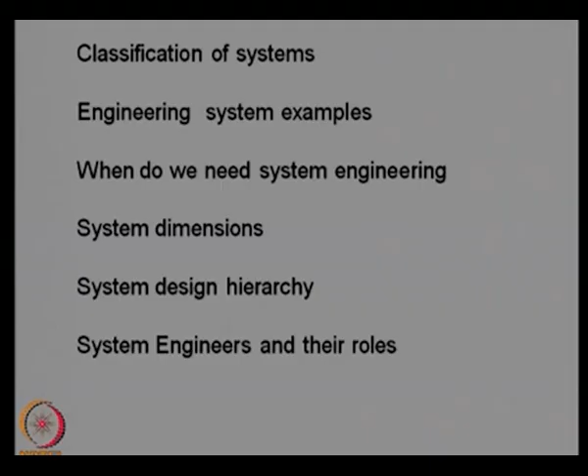So let us look at the classification of systems. As we explained in the last class, we found that there are various kinds of systems. There are man-made systems and there are natural systems. So we can basically divide these systems into two classes: one is the natural systems and the other one is the artificial systems.

As we know, natural systems exist in nature. The human body is a system, the ecosystem is there, and we have the systems of planets and other celestial bodies. These are natural systems, and there are complex natural systems, such as the human body, where the complexity of the system is still not fully understood. So these are examples of natural systems, where some are very simple but some are very complex, which is beyond our analysis at this stage.

But then we have systems with human intervention or human behavior, like artificial complex systems with complex technical but simpler human structure, artificial complex systems with complex human but simpler technical structure, and artificial systems with both technical and human structural complexity. So depending on the system type, we can classify them based on whether they are complex in human behavior or complex in technology or technical behavior.

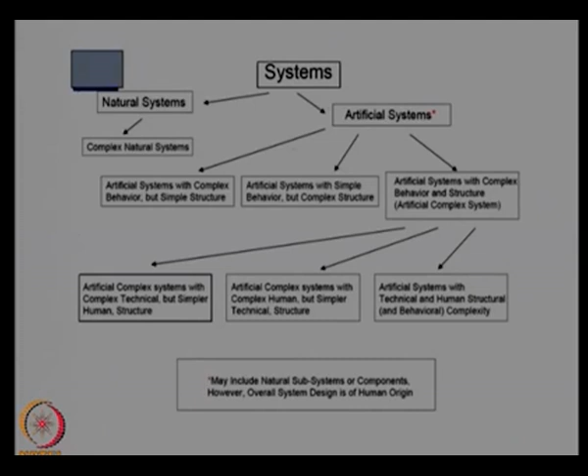Let us take a few examples of these systems and try to understand what subsystems are involved and how they have become part of a larger system or a subsystem of some other system. Take for example spacecraft as a system. As all of you know, it can be considered as a system composed of a variety of subsystems. Every spacecraft has many subsystems, and this spacecraft architecture is well defined, because there is a well-defined structure for the spacecraft architecture, and the subsystems are in turn composed of even smaller subsystems.

For example, take the communication subsystem or the payload system of a spacecraft. As you can see, communication is a payload in a spacecraft, and we can consider this as a subsystem of the spacecraft. There are many other systems that are part of the payload. You can see that the antenna is a part of the communication payload, along with amplification, modulation, demodulation, routing, encryption, decryption, filters, and multiplexers - these all become part of the subsystem of the spacecraft.

Similarly, we have the spacecraft bus where the attitude determination and control is there, command and data handling is there, payload processing is there, then power, propulsion, software, structures, telemetry, thermal systems. So these all become part of the main system. If you take spacecraft as a system, then you can find these are the subsystems of the spacecraft.

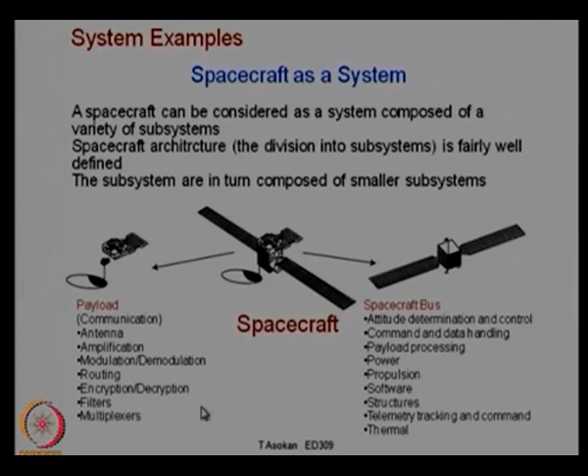But if you take the space system as a whole system, then you will find that the spacecraft is part of a larger system, which is the space system. You will have many spacecraft in the space system, which is the other spacecraft in the constellation. Then you have the different segments for the space system, like the ground segment, the space segment, and the launch segment. So these all become subsystems, main system of the space system.

Though spacecraft can be considered as a system by itself, when we define the space system, then the spacecraft becomes a subsystem of the main space system. Thus any system can be considered as a subsystem of a larger system, or it can be considered as a system by its own merits. So it depends on how you actually define the system and what you are going to design. Depending on that, we need to define what is that particular system and what are the subsystems of the main system, and then how do you define the boundary of the system and the subsystems.

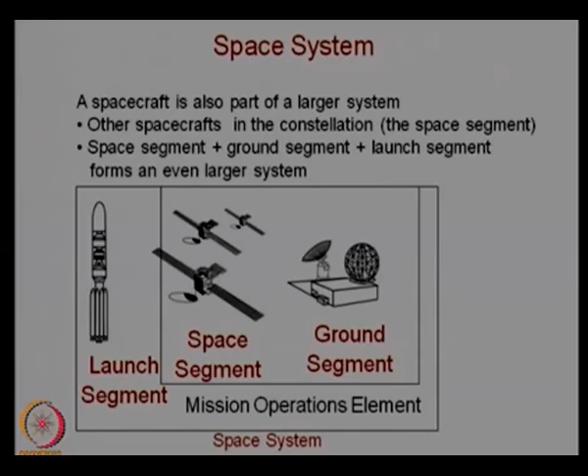As you can see here, this shows the space system, where there is a launch segment, a space segment, and a ground segment, which are all part of the main space system.

This figure shows another diagram of the product development system for Ford Motor Company. We will not go into the details of this figure now, because we will be discussing it later when we discuss the product development process or the system development process. It shows how, from the initial customer requirements, customer satisfaction is achieved through various processes, passing through different stages of design, fabrication, testing, integration, and validation, and then to reach the customer. So the development itself becomes part of a major system, the product development system. We will discuss this in detail at a later stage.

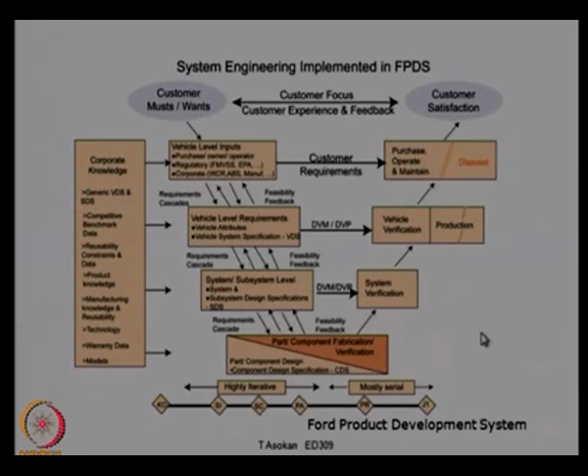This is another example of a complex, man-made system: the air defense system. As you can see, the air defense system has various subsystems. Something can be in the air, something can be on the ground, and something can be completely controlled by man, or completely automated with different sensors and signal processors kept at different locations.

There are radar sites which are used to find the locations of aircraft. Then there are early warning and control systems, which consist of many aircraft and other sensor suites. Then we have the air traffic control center, which controls the movement of air traffic. Then you have the interceptor bases where the air defense systems are placed, from where they can take off and carry out the missions.

Then there are civil defense applications for this particular system, where civil defense centers send information to the main database center or control center. Then we have ammunition systems at various locations, and radio sites for transmission of signals. And then we have all those base centers which coordinate the activities of various centers as part of this system. So as you can see, it's a fairly complex system with various subsystems and a lot of interaction between these systems, and therefore the system engineering concept is well suited for this kind of complex man-made system.

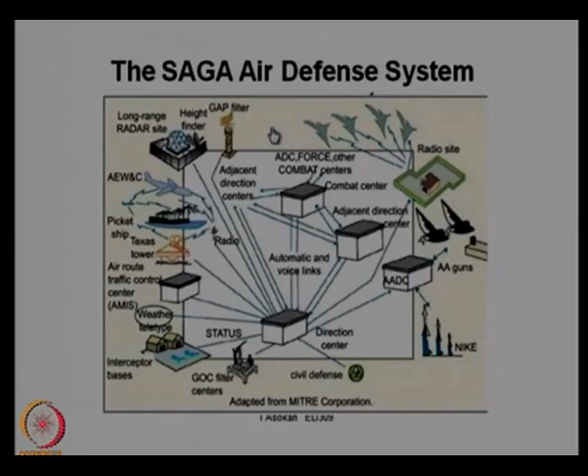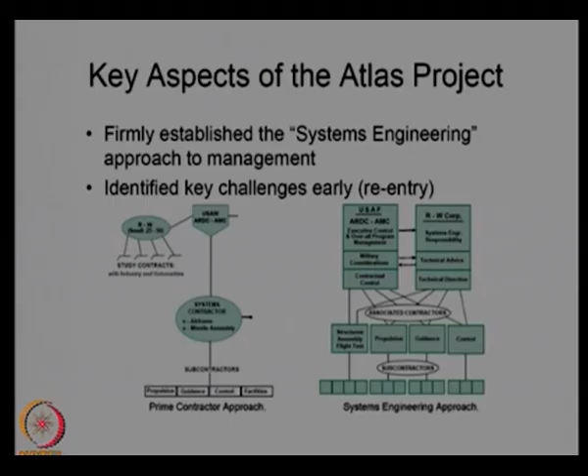So we saw that there are different kinds of systems and different kinds of complexities in the system, but we need to find out when we really need to apply the system engineering concept, whether all projects are good candidates for system engineering or whether there are projects which do not warrant the need for a system engineering concept. So how do we decide this based on our approach to the project or our understanding of the project?

We discussed some of the failures in the previous class, system engineering failures, where we discussed the airbag system failure for passenger cars, and we found that there was a failure in the requirement analysis of the project. There was a failure in Pathfinder, which is again a space system where the communication failed. This was because of an interface design failure, and again the Ariane 5 launch vehicle failure we discussed.

These are all various examples of system failure, and whether they are candidates for the application of engineering system design. If you look at this, we need to find out the real causes of system failures to see what actually happened in the system or what actually caused the failure of the system.

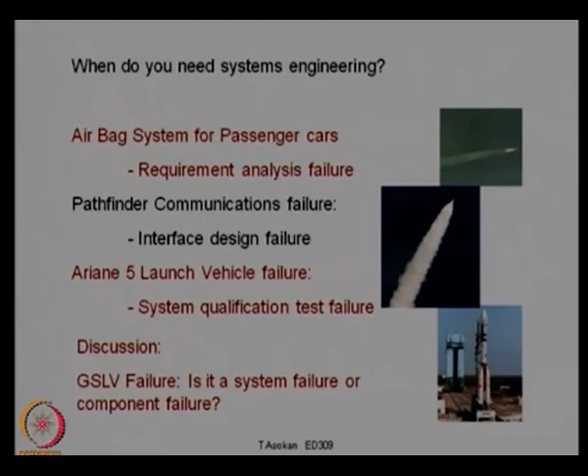Now this discussion point is for you: you can find out from the literature or through discussion with your friends or colleagues what actually happened in our GSLV failure. We know that our geosynchronous satellite launch vehicle failed recently, and there were many accounts for the failure of the system.

So probably you can identify whether there was a system failure or a component failure. We should be able to distinguish between these two - what actually happened, whether there was a failure in the whole system or the process of development of the system, or there was a component failure which was more of an engineering failure that failed to meet the desired design requirements of that particular component.

When you analyze this kind of failure, you will know whether it was a problem with the technical design of the system or a problem with the whole system design. Based on that we will be able to tell whether this was a failure in system engineering, and therefore we need to look at the process and procedures we followed for engineering the system, and accordingly go ahead with the design of the system or apply the principles of system design.

So let us look at the criteria for deciding to take the system engineering principle for a particular project. The characteristics of a system whose development, test and application require the practice of system engineering: the system is an engineered product and hence satisfies a specified need - that is one of the basic requirements, and most systems satisfy this. The system also consists of diverse components that have intricate relationships with one another, and hence is multidisciplinary and relatively complex.

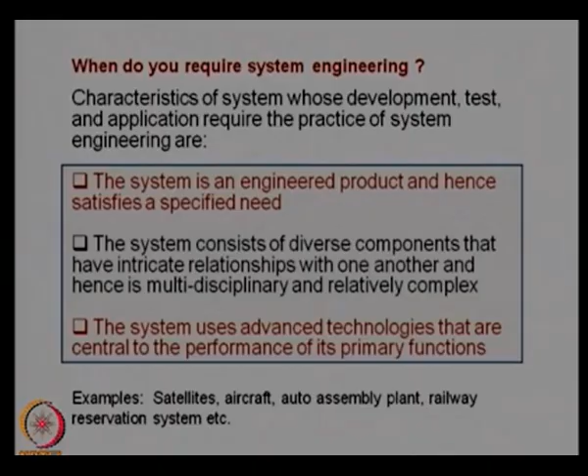For example, if you take the railway reservation system, which is one of the best online systems we have for booking railway tickets, you know that there are multiple subsystems. There are customers, booking agents, railway station booking facilities, centralized servers, and payment agencies. All these are interacting with the main system, and they are using the latest technologies of communication and networking as well as data analysis and data processing. So that becomes a very good candidate for applying the principles of system engineering when we develop systems of complexity like this.

So in the previous class, system engineering integrates all the disciplines and specialty groups into a team effort, forming a structured development process that proceeds from concept to production to operation. If you apply these principles of system engineering, we can have a structured design process which proceeds from concept to production to operation of the system, and it considers both the business and the technical needs of all customers with the goal of providing a quality product that meets the user needs.

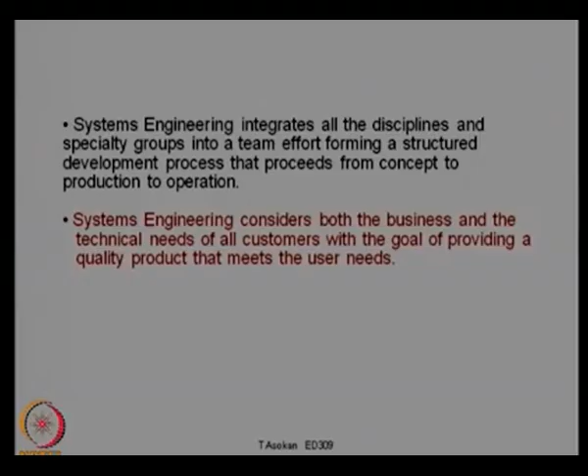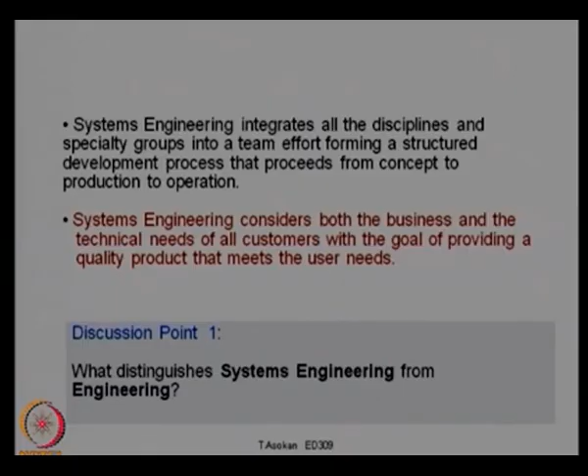Okay, so this is again a discussion point for you. We discussed system engineering in detail. So what actually is system engineering, when do we use system engineering principles, and what are the basic requirements of applying system engineering? You can have a discussion on what distinguishes system engineering from conventional engineering, and how a system engineer is different from a conventional engineer or a domain expert. This will help you to understand the system engineering concept in a better way, and appreciate the importance of system engineering in developing complex engineering systems.

We discussed the system, and as I mentioned, the system has a technical component as well as a human component, because there are complex human systems and complex technical systems. So let us look at the technical dimensions of the system. As you can see, there are 6 levels of technical dimension for any engineering system. So we will start from the highest level.

It is basically the physical environment of the world where the system operates, so we call it the system context. Every system operates in a particular environment, so that environment becomes one of the dimensions of the system, because all these dimensions are important in system development: they have an impact on the system, or the system can be impacted by those factors.

So the highest one can be the physical environment of the world, and then we have different levels. If I start from the lowest level, level 0, that becomes the parts or lines of code of a system. You will have very small components which are off the shelf, or which do not require any specific design, like nuts, bolts, screws and small fasteners. These all become parts, the 0th dimension of an engineering system. In software, the lines of code become the 0th dimension.

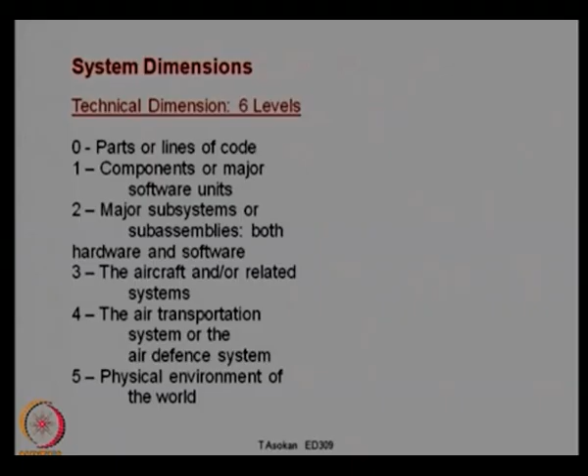Let us look at the social dimension. Every system has social dimensions because it has some social impact: humans are involved, and it is mainly designed for human use, so there is human intervention or human impact on the system. Again, we can have 6 levels of social dimensions. The highest level is the society, nations or communities where the system is being used, depending on the country or society where it is implemented.

The lowest level is the individuals who directly interact with the system or are directly involved in its design, development, use or maintenance; that becomes the 0th level dimension. Then there are working groups or teams, either development, operation or maintenance teams, which become the next level. Then the organizational units: in an organization there will be a design team, a fabrication team, a machine maintenance team. That becomes the 2nd level, the organizational units.

Then single organizations are the next level, where a larger organization like DRDO has many labs across the country, and each lab becomes a single organization, the 3rd level dimension. Then there are extended multi-organization enterprises, including partners and suppliers: a group of suppliers, consumers and subcontractors, the 4th level. If a company is developing a system, there are many suppliers, quality assurance teams, organizations which monitor quality, and organizations which will finally use it; they are also part of the system.

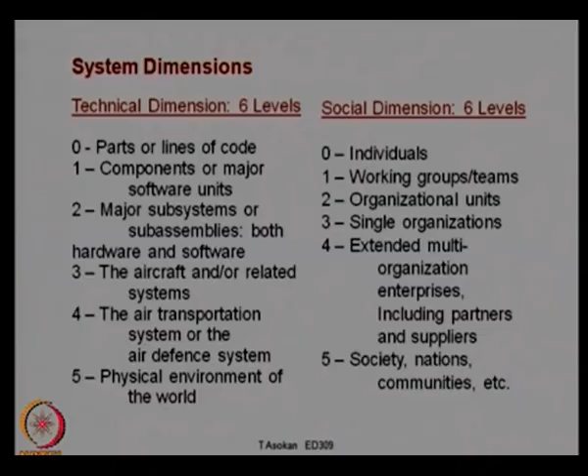So as you can see, there are technical and social dimensions for an engineering system, and therefore we need to look into the social aspect as well as the technical aspect of the system design when we start the design and development of an engineering system, which is finally going to be used by the customers, where there is a lot of human interaction as well as technical complexities.

So we discussed the different dimensions of the system, and I told you that there are different technical dimensions for the system. As I mentioned, there are lower level parts or components which become the 0th level system dimension. Then there are sub components, where the signal amplifier, cathode ray tubes, gear trains, valves or nozzles become the sub components. Then we have the components like signal receivers, data displays, power transfer, material reactors, thrust generators, etc.

Then we have the subsystems, where signal networks, database, material preparation, engines, etc. are being used for developing the final system. And you can say that the communication system can be a system on its own merits. Then there are information systems, material processing systems, aerospace systems.

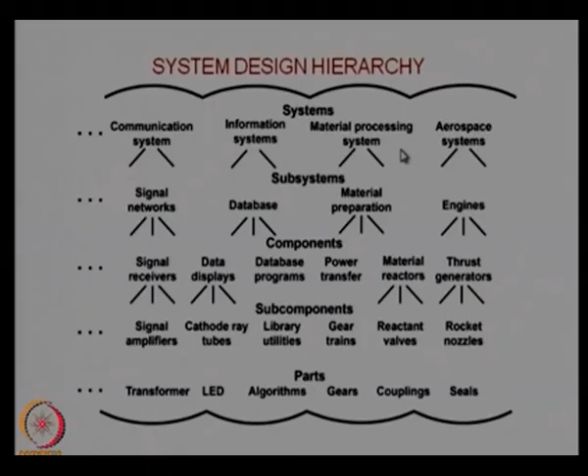So these are all the top level systems, and of course when you use these systems for another system, they become subsystems of another major system, like an air defense system. If you take that as the main system, then communication, information, material processing, all these become subsystems of the main system. So that was about the system in general.

Then we need to see who are the people who design it and what they do. The people who are responsible for design, development, integration, verification and validation of engineering systems are known as system engineers. They are different from the engineers or domain experts like a mechanical engineer, electrical engineer or electronics engineer. System engineers are not exactly the domain experts, but people who see the big picture and try to integrate many things into a single piece.

So they have the larger picture of the system, and they know what can go wrong and what issues are coming up. So they do the troubleshooting and make sure that the system development process takes place in a structured manner without any problems. System engineers design the overall architecture, but they are not the people who really design the components. Component design is done by the domain experts, like mechanical engineers or electrical engineers.

They prioritize the system requirements. There are different requirements for the system. Those who are designing a component may not know the actual requirements of the original system which the component is part of. So the system engineers are the people who prioritize the system requirements and identify the components or the requirements of the components, and then pass them to the design engineers.

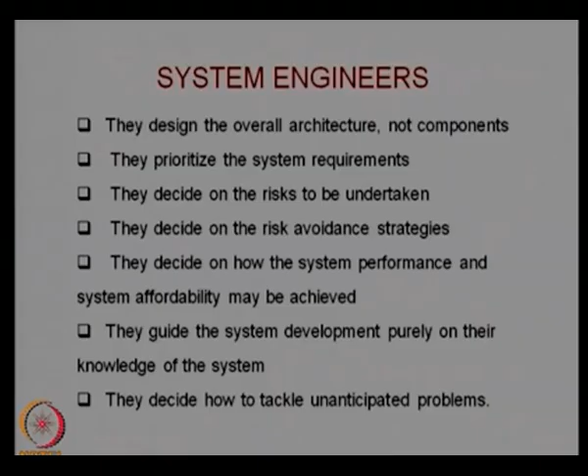So what are the knowledge domains where the system engineer operates? As I mentioned in the previous slide, their responsibilities are much more than the design of components. So they are the people who actually manage the whole design process. What are the domain knowledges or domain areas where system engineers operate?

As you can see in this picture, the parts and subcomponents are the duty of a design specialist. So the system engineers will not get involved in the design of parts or subcomponents. They will just give the specification for these components and parts to a design specialist. Then the design specialist will design the component, select the material, select the software or whatever subsystem is required for that particular design. They will identify those requirements and then develop the parts or subcomponents and pass them to the next level where the components are assembled or integrated into a subsystem.

Then there are subsystems and systems, which are actually the domains of the system engineer. So the system engineer is the person who does the integration of systems, directly involved in getting these components into subsystems and integrating them into the major system. So the domain of the system engineer is in this area, where subsystems and to some extent component level integration are part of the system engineer's responsibility, and the design of parts and subcomponents is purely done by design experts.

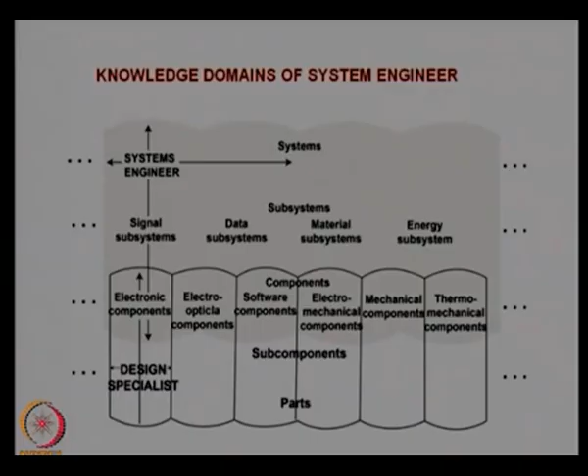So they are people from the electrical engineering domain, mechanical engineering domain, electronics, or software specialists who specialize in a particular component development. There will be separate design teams charged with designing these components, and finally it will go to the system engineer, who will integrate them into subassemblies, do the testing, verification, and all the required procedures to ensure these components and subsystems perform to the desired requirements. Then they go for integration to the system level, and finally the system will be delivered to the customer by the system engineers.

So there is a clear role for the system engineer, who is actually responsible for the delivery of the system, and therefore they have the big picture of what is actually expected from the system. Accordingly they work to make sure that all these components and system subcomponents designed by the specialists are meeting the requirements of the system. These are the responsibilities of the system engineer. So a good system engineer needs to have some characteristics which are actually needed for managing the whole project.

So these are people who actually enjoy learning new things and solving problems. Every project is a challenge, every project is new to the system engineer, and they really enjoy learning new things and solving problems, and they like challenges. These are people who really like to take challenges, design something new and try them, and even with chances of failure, they will try to make sure these new challenges succeed, and they keep doing these things because they love taking challenges.

They are skeptical of unproven assertions. So whenever there is an unproven assertion, they will question that particular assertion and keep challenging it to make sure they understand the whole concept, and that they are working with complete knowledge of the whole process or the system. They are open minded to new ideas, since every time there needs to be new ideas and new concepts for developing systems.

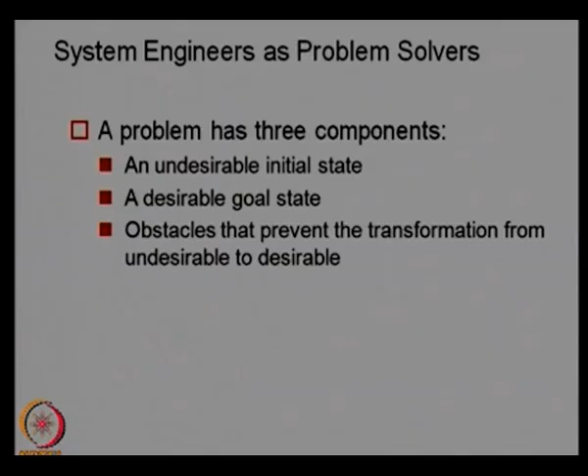Then what actually do system engineers need to do? System engineers act as problem solvers. These people are really into solving problems almost every day. Every problem has three components, as you can see: an undesirable initial state, a desirable goal state, and obstacles that prevent the transformation from undesirable to desirable state. These are the three components of a design problem, and every engineer tries to solve these to get a solution.

So as a system engineer, as a problem solver, you look at the problem: what is the undesirable state, what is the desirable state, and what are the things which prevent reaching that desirable state, and then try to find a way to reach that desirable state. That is the role of a system engineer.

The characteristics of good problem solvers are that they are intelligent and creative. Creative thinking is an important quality of a good problem solver. He needs to look at the problem in an intelligent and creative way, and try to see whether he can adapt an existing technology, or look for a new technology, or find a totally new or innovative way to solve that problem.

They are good decision makers. Their decision making behavior is very good. They recognize dependencies very fast, estimate the importance and urgency of the particular problem, and maintain continuity while being very flexible to make changes whenever needed. They are also very good at accepting failures. There is no fear of failure for these problem solvers, because there is always a risk of failure, and it is part and parcel of any problem solving.

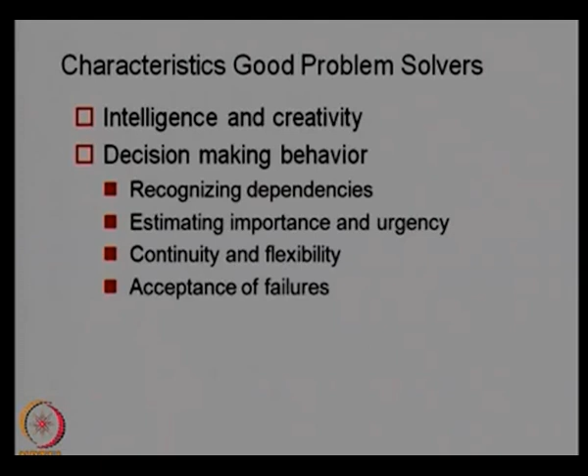At this stage I would like to give you a few assignments and project work. The first assignment for you is to identify 5 natural systems and 5 artificial systems, decompose one of these systems into technical and human systems, and identify the levels of interaction.

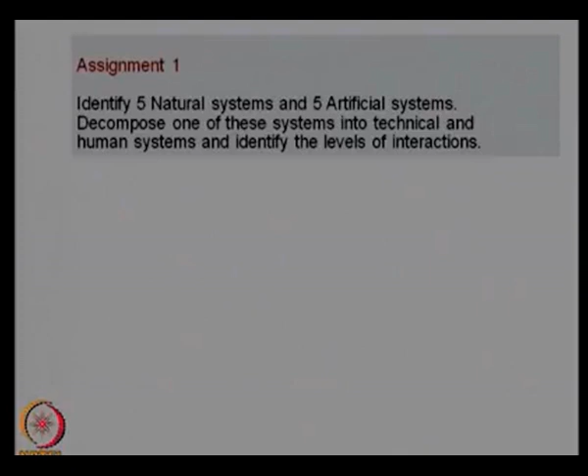As I mentioned, there are many natural and artificial systems. Identify a few of these systems and take any one, then decompose it into technical and human system, and try to understand the interaction between them. There will always be interaction between the human system and the technical system, so try to identify what types of interaction take place.

As I gave you many examples, like a railway reservation system, a satellite system, or a missile system, you can take any artificial system you find interesting, analyze it, and identify the technical and social or human dimensions and the interaction between the human and technical systems.

This is the first assignment, and I would like to give you a group work. Of course, if group work is not possible, you can take it as an individual assignment. From the history of industrial disasters, identify one case study for a system failure.

I have explained many system failure case studies, so I request you to consider one system failure which is not discussed in these lectures. Identify the causes for the failure and make a presentation highlighting factors like the system details, failure modes, failure analysis, root cause, and the proposed solutions.

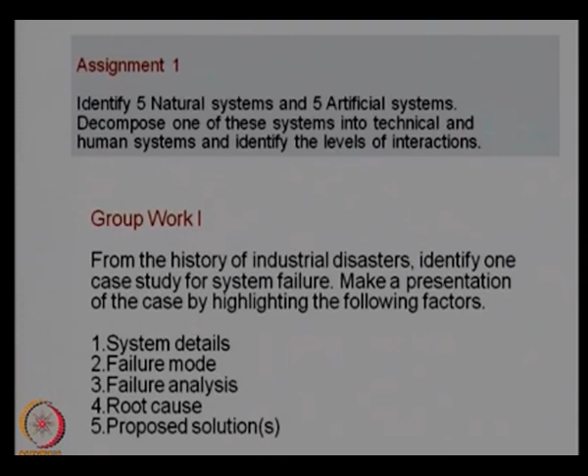These are the things you need to do with this case study. Once you go through it, you will have a lot of information on where it actually went wrong, whether it was a real system failure or a component failure, and if it was a system failure, what could have been done to rectify it, or from history, what was actually done to solve that particular problem.

So make a good presentation and then you can send it to me. We will discuss it if you want to do so.

There are multiple softwares available for engineering system design. One of these is Core, and there is another called SysML. Core is available commercially from Vitech Corporation, www.vitechcorp.com. IIT Madras is a partner in Vitech's university education program.

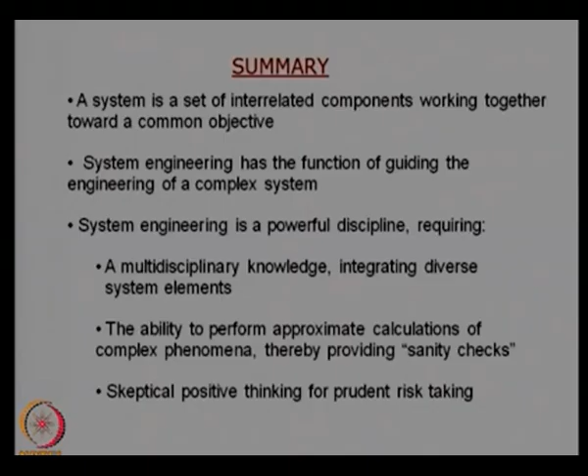To summarize this lecture: we identified that the system is a set of interrelated components working together to provide an objective or goal for the project, and system engineering is the function of guiding the engineering of a complex system. System engineering is a powerful discipline requiring multidisciplinary knowledge, integrating diverse system elements and the ability to perform approximate calculations of complex phenomena, thereby providing sanity checks and skeptical positive thinking for prudent risk taking.

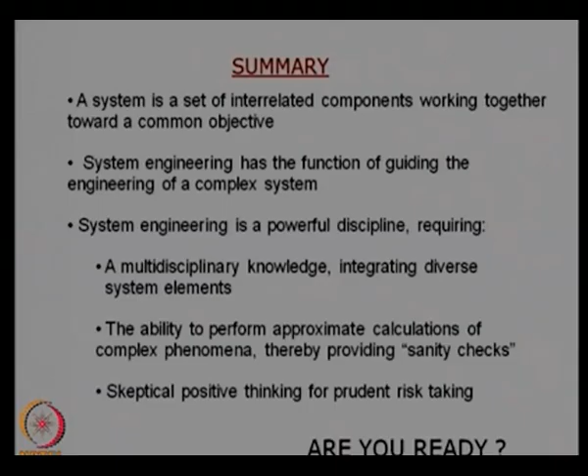That ends this lecture. From the next lecture onwards, we will look more into the complete design or development of a system from a system engineering perspective. I will take you through some methods and procedures to design engineering systems. Till then, goodbye.